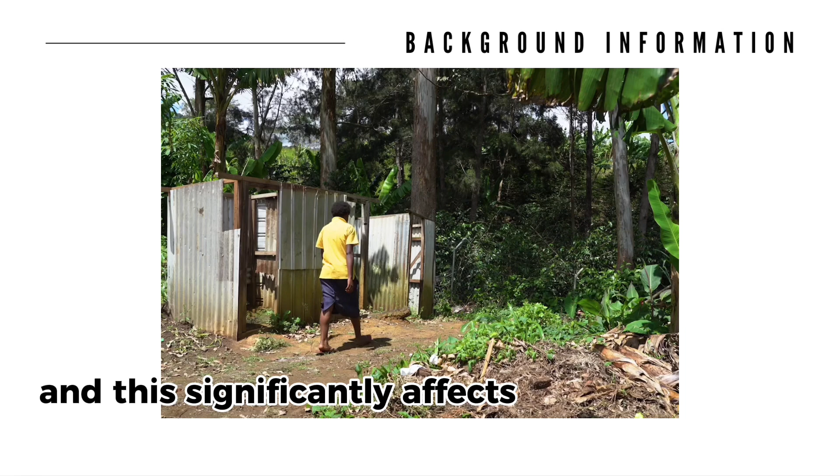According to UNICEF, this water and sanitation problem has caused diseases that are one of the leading causes of death for children under 5 years old. In Papua New Guinea, 55% of the population lacks basic water services. There's a major sanitation and hygiene problem there. They have very limited access to clean water, and this significantly affects public health and well-being. A large portion of the population practices open defecation in pit toilets, fields, bushes, rivers, and beaches.

This is because of the geographic challenges, limited infrastructure, and poverty. This not only spreads waterborne diseases like cholera, diarrhea, and typhoid, but it also worsens the environmental conditions.

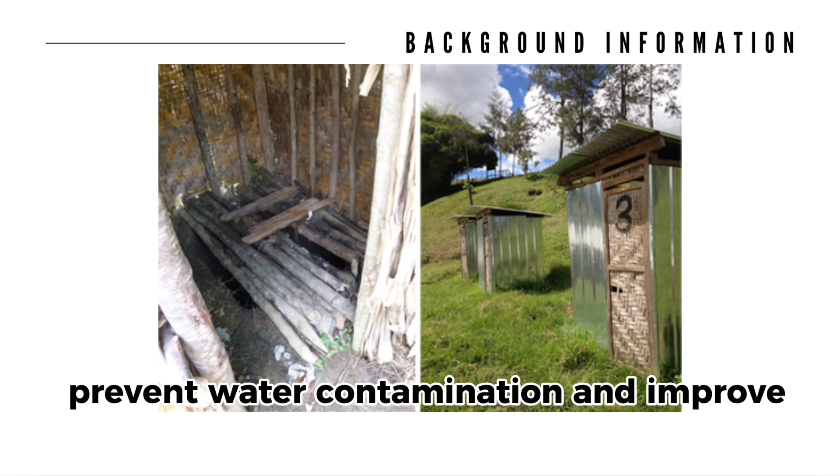Our goal is to promote healthier sanitation and cleaner water in Papua New Guinea by implementing eco-friendly toilets. By providing sustainable and hygienic sanitation solutions, we aim to reduce open defecation, prevent water contamination, and improve overall public health. Our idea of eco-friendly toilets is cost-friendly, accessible, and easy to implement even in underdeveloped areas like Papua New Guinea. We believe that areas like these are where eco-friendly toilets are the most needed, which is why we came up with this idea.

These toilets help manage human waste safely without polluting water sources, minimizing impacts on the environment. This is essential for many things, such as agriculture, fishing, and clean drinking water.

Eco-friendly toilets are toilets that use aerobic decomposition to break down human waste, instead of flushing it away in watery sewage, and they do not use water at all. So, they do not need to be connected to a city wastewater system or septic tank, which will be very suitable to implement in areas that experience clean water scarcity, as this system keeps the water clean by not using it.

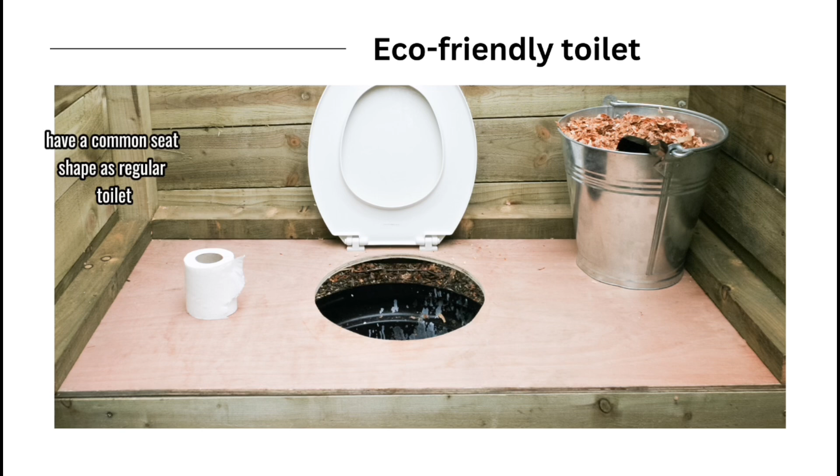An eco-friendly toilet has a common seat shape like a regular toilet, but other than that, it has a simpler design. Below the seat, there's a container to collect all the materials. After every use of the toilet, it has to be flushed with sawdust to help add the proper mix of basic chemicals to break down the waste materials.

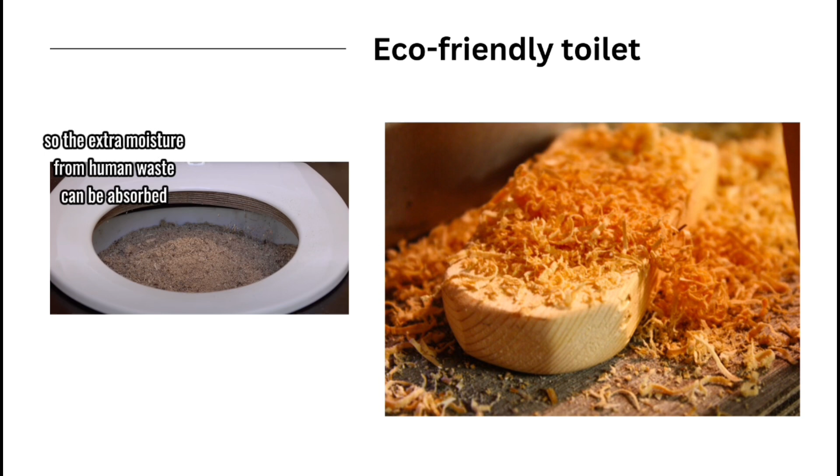Sawdust is a byproduct of wood processing activities. It consists of tiny wood particles. It has very cool absorbent properties. It is highly absorbent, so the extra moisture from human waste can be absorbed, eliminating odor from the toilet.

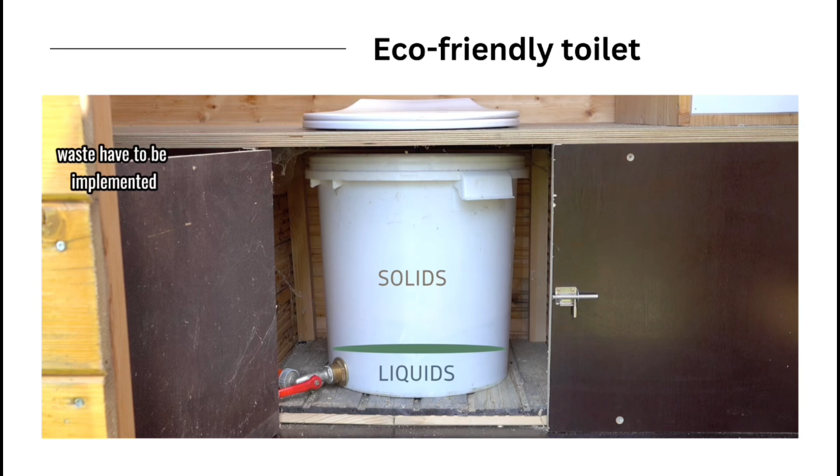Next, in order for the waste to be completely kind to the environment without releasing pathogens, separation of liquid and solid waste has to be implemented. So, inside the container, there must be a sieve with a support so that the sieve will not fall. The sieve is made of plastic and used to separate the liquid waste from the solid, which also enhances hygiene.

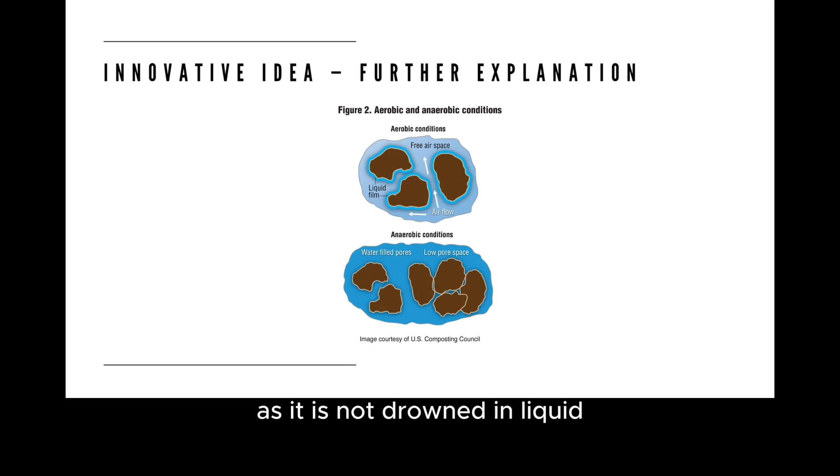Using sawdust instead of water to flush toilets has several advantages for hygiene. Firstly, sawdust is absorbent. Helped by the filter in the toilet, the sawdust takes fluids out of human waste. This means an aerobic, that is, having plenty of oxygen, dry environment is created, as it is not drowned in liquid. These conditions limit pathogen growth.

In addition, sawdust covers the human waste in the toilet, keeping pests from spreading bacteria. Lastly, waste decomposes naturally and is contained within the toilet, which prevents soil and water contamination.